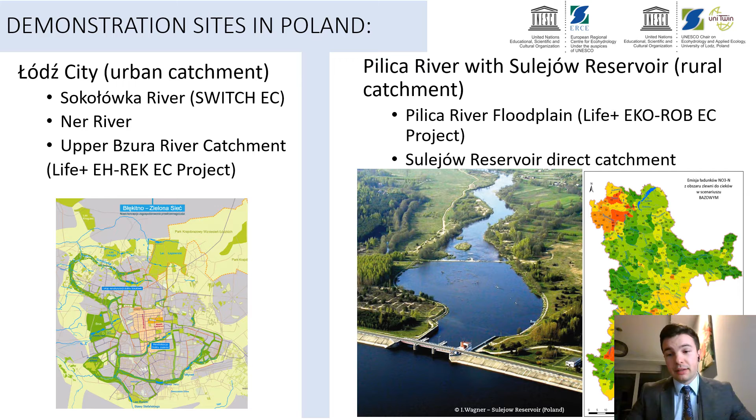Located in central Poland, Łódź is a city with environmental problems similar to all of the urbanized areas worldwide. Locally performed climatological studies have revealed a close association between density of urban development and a heat island effect in the city, where the difference can reach even more than 10 degrees between city center and less urbanized areas.

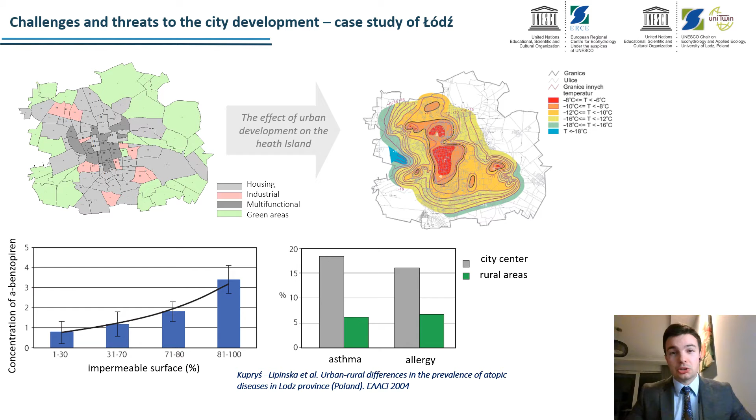Moreover, studies performed in cooperation with a medical school indicated the correlation between concentration of benzo[a]pyrene, an air pollutant, and rate of impermeable surface, with the biggest pollution in areas with limited blue-green infrastructure. This correlation also has a reflection in the residents' health. When comparing asthma and allergy among children in the city, they found a huge difference between center and suburban areas.

We need to remember that one grown tree can evaporate up to half a cubic meter of water per day. This is ecohydrology. This also increases the air humidity and reduces the concentration of dust and pollutants.

And of course, as the most visible problem, observed particularly during heavy rainfall events in Łódź city, is the flood - the flash flood in the urban area. This is of course a very serious problem which is generating huge infrastructure damage and decreasing the water quality within the urban areas.

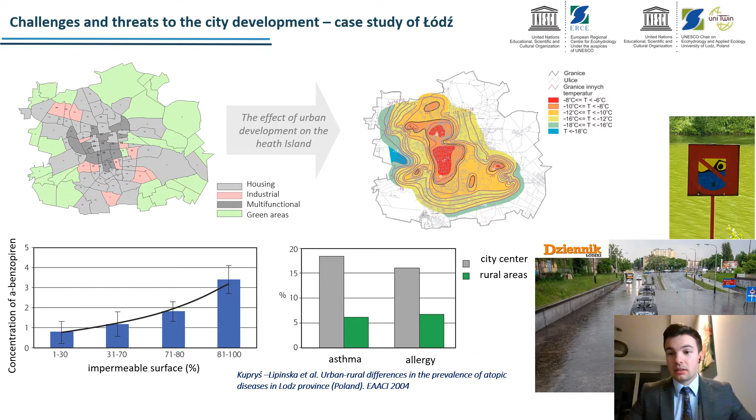To reduce the negative effect of climate change and human impact, presented here by urbanization, on water resources, we should increase the permeability of landscape and use ecosystem processes to increase water quality so it can be safely stored without toxic algae blooms. One of the earliest ecohydrological solutions providing a low cost but highly advanced way of water purification is...

...the sequential sedimentation biofiltration system, developed and implemented by Professor Maciej Zalewski and his team in 2007 in Łódź. This system uses only natural processes and achieves high efficiency, as it can remove over 90% of sediments and 50% of nutrients.

The first zone of this system is an enhanced sedimentation area, where sediments and high-density pollutants are being removed. The middle zone is a geochemical barrier, where, due to the application of calcium-rich rocks and other sorbents, we can trap pollutants dissolved in water. The last zone can be described as a constructed wetland, with plant species selected for intensive pollutant removal.

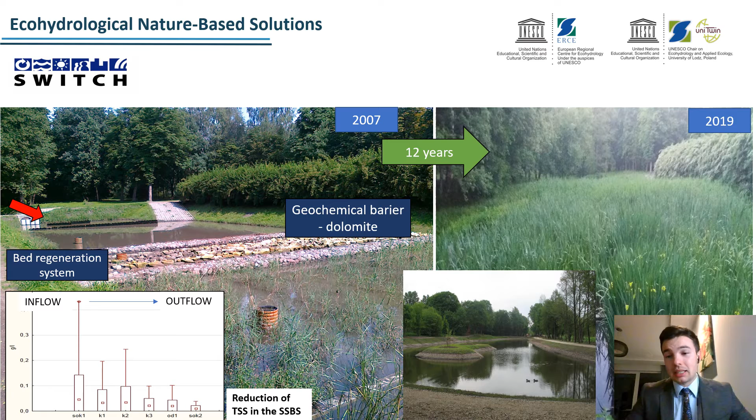Thanks to this system, a series of reservoirs have been developed downstream with high resilience to toxic algae blooms. You can see the picture also of one of these reservoirs, in a very attractive recreational area in Łódź city.

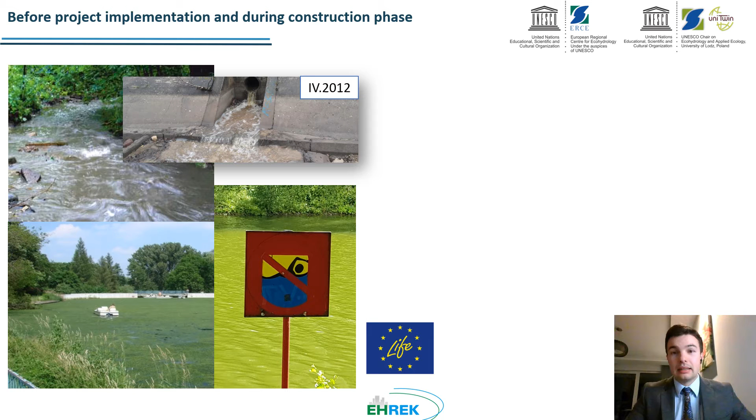In another part of Łódź city, the biggest recreational area was suffering from eutrophication, limiting the ecosystem services for local society. After the identification of threats, which is also the first principle of ecohydrology, and analysis of ecological processes taking place in this area, an implementation phase has been proposed and then started.

You can see the modification of the sequential system in this U-shaped area in the top picture, where this system was shaped like this to mitigate the impact of point sources that were located on the shoreline of the reservoir. This project was implemented under the LIFE program of the European Commission.

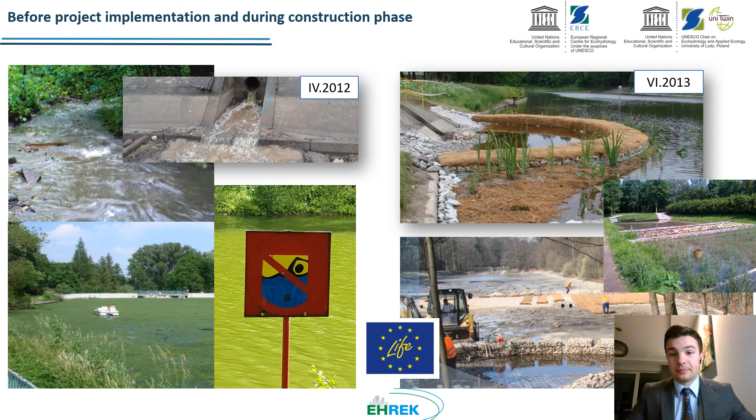During this project, in some places, pollution was identified as extremely high. So then, based on the ecohydrology concept, the so-called hybrid systems have been proposed. They integrate the engineering approach and ecohydrological solutions, creating sustainable technologies with high efficiency.

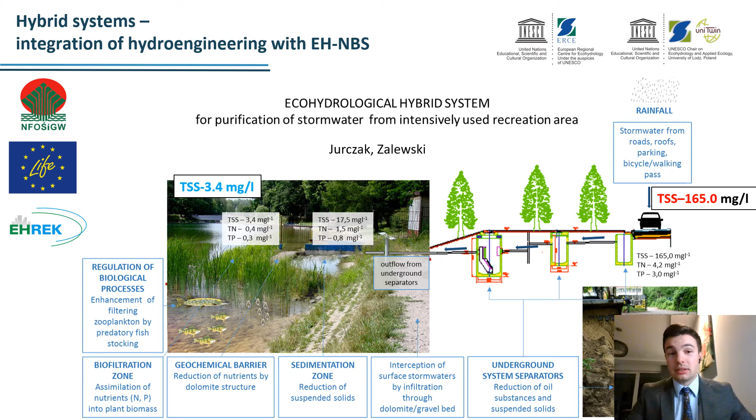Total suspended solids have been reduced with such a system from the level of 165 milligrams per liter to only 3.4 milligrams per liter. This kind of solution provides an alliance between ecohydrology and traditional engineering, guaranteeing very high efficiency of the solutions.

As a result of ecohydrology implementation in this reservoir, water quality has been significantly improved and ecosystem services rebuilt, with strong support of SDG goals. As a result of this great success, the European Commission has awarded this LIFE project with an award, Best of the Best.

Another demosite is located within the area of Sulejów Reservoir, which has been built by damming the Pilica River in central Poland, with the intention to supply local inhabitants, including Łódź city, with drinking water.

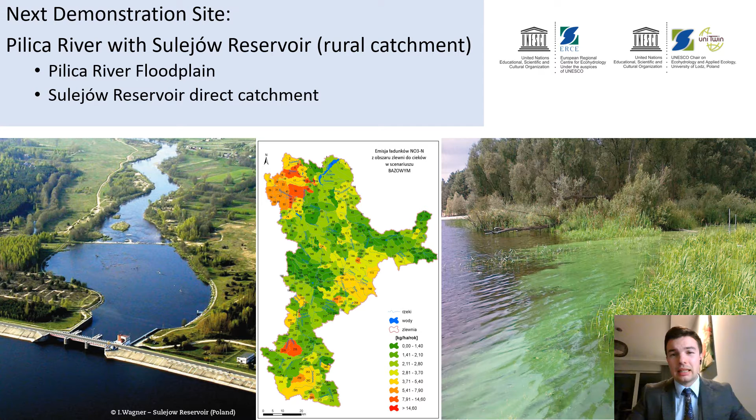Unfortunately, due to the bad quality of Pilica River and mismanagement of the reservoir, toxic algae blooms have seriously limited services, including drinking water supply, but also tourism and recreation in this area, seriously impacting the local economy. The catchment of Pilica River is dominated by agriculture, with several hotspots generating nitrogen and phosphorus pollution.

Therefore, enhanced riparian buffer zones have been proposed to solve the problem of nitrogen and phosphorus pollution, both in surface and subsurface runoff. This is an ecohydrological solution, as it is based on the understanding of molecular processes between the hydrological cycle and biotic components, such as bacteria.

In case of denitrification, specific groups of bacteria are activated to reduce nitrogen, and in terms of phosphorus, selected sorbents are applied to trap the pollution within the barriers. Here on this graphic, you can see the representation of both kinds of enhanced riparian buffer zones.

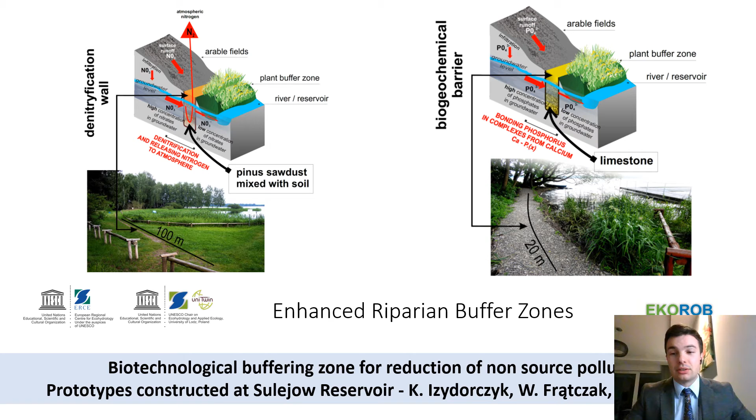This idea of enhanced riparian buffer zones was developed under the LIFE project EKOROB, which was implemented by the European Regional Center for Ecohydrology.

The direct catchment of the Sulejów Reservoir is also agriculture dominated, as you can see from this picture. Therefore, one of the demonstration areas was located within the buffer zone between agricultural landscape and the reservoir. Before project implementation started, the area was highly degraded, as you can see from these pictures.

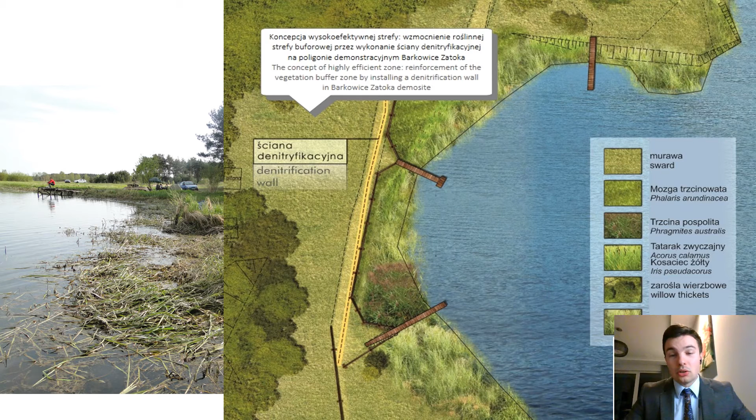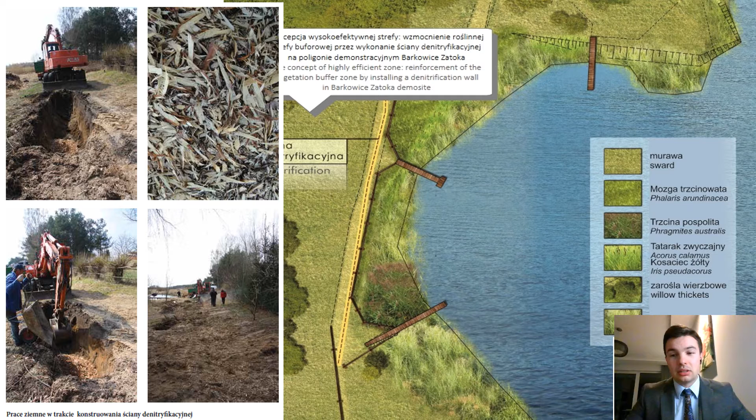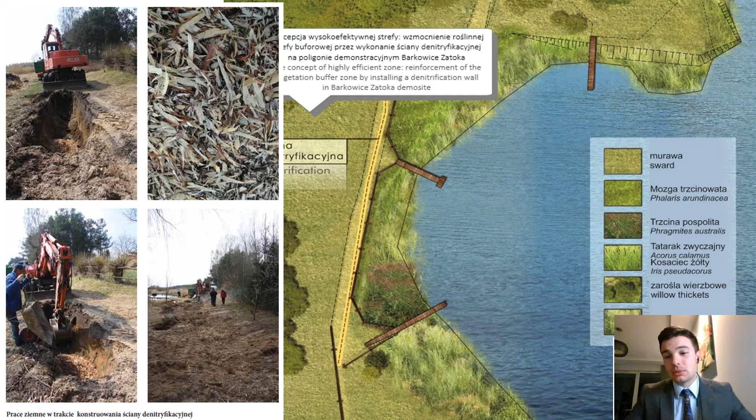Then the concept of area remediation was proposed within this project. Here on the picture, you can see the material we are using to enhance the microbial component of the soil. We are using wood chips to increase the organic matter content in the soil and create favorable conditions for bacteria to start the denitrification process.

This is to remove nitrogen from the subsurface flow in the underground water. Also, a pathway was created to navigate tourists and anglers, so the strip of green area is protected here. Of course, plants and vegetation have a huge role in self-purification of the ecosystem.

Moreover, wave protection units were developed to protect this littoral zone and the plants. This area currently looks like this and is visited by huge numbers of tourists, an example of successful remediation, including the enhancement of ecosystem resilience.

This denitrification barrier, as I explained, is located under the pathway you can see in this picture. So all the pedestrians are able to move in this area and they don't even notice this ecohydrological solution existing close to them.

Of course, educational boards exist in this area, so the local society and all the people visiting this place can also be educated about ecohydrology.

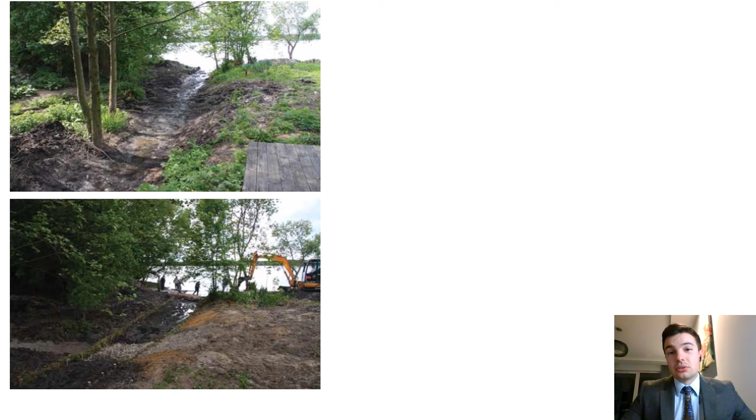Another site was identified as a source of high levels of phosphorus and sediments. It was also a highly degraded area within the borders of the Sulejów Reservoir, so a different kind of barrier was proposed here to trap the pollutants.

The most important pollutant was phosphorus, which was present in these waters especially after heavy rainfall. It was washed away directly to the reservoir, generating toxic algae blooms.

So you can see that the barrier to trap the phosphorus was organized in a way that it looks like a pathway. This small stream could be easily passed through by pedestrians, while the water filtrates through the barrier and pollution is trapped within it.

Also, some additional recreational area was organized there to also increase the economic value of this area.

Although we can get a high efficiency of ecohydrological solutions right now, we continue our endeavors in developing even more advanced technologies. Recently, during my PhD studies, we elaborated an innovative material efficient in phosphate removal, but also ready for plant growth support and promoting growth of helpful microorganisms.

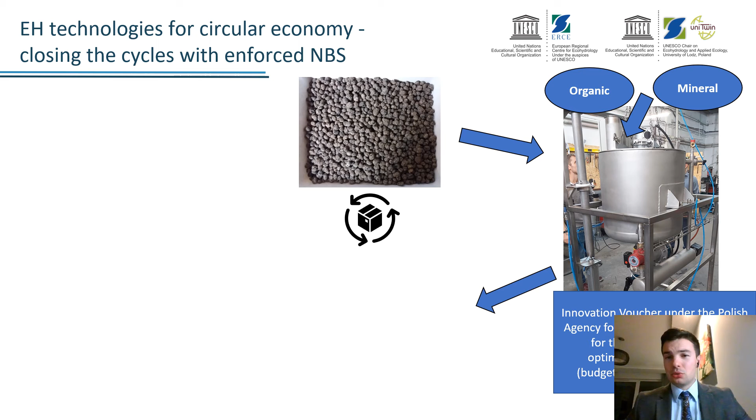From this point two years ago, our technology has progressed toward the integration of ecohydrological solutions with circular economy. How do we do this? First of all, the core of BioCare is a resistant and environmentally safe component.

Then we use a specially designed mixer to integrate all the components, the organic and mineral matter, and to create blocks ready to absorb the pollutants inside the aquatic system.

In this case, we have focused on phosphorus, as this element's resources are depleting and implementation of circularity is extremely necessary to reduce our pressure on the environment.

With phosphorus trapped, it can be used as fertilizer directly in a hydroponic system, or by chemically or physically removing phosphorus, it can be used later as fertilizer directly in agriculture. Then the core of the material can be reused again and the cycle is closed.

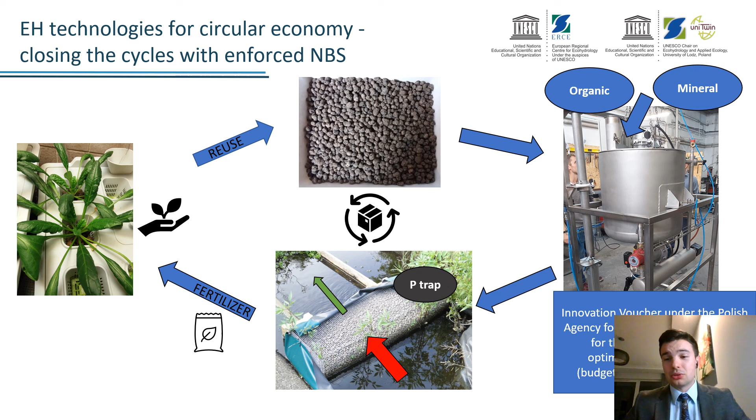So here we connected the circular economy idea with ecohydrology-based solutions. This is also the future of our implementation.

Here we are at the end of my presentation. I must admit that I regret that we could not visit the beautiful Ecuador this time.